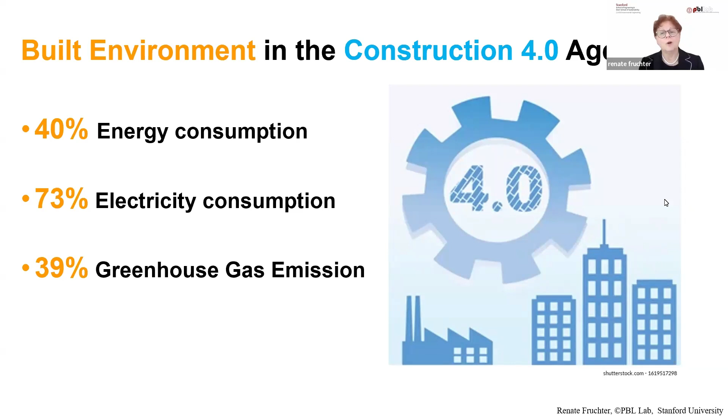Addressing in their projects the current climate emergency, coined Code Red for Humanity by the UN Secretary General, as well as reflect in their projects our AEC industry's responsibility to adopt innovative construction 4.0 processes, digitalization, industrialization, prefabrication, and new materials to build more sustainable buildings for current and future generations.

So, to address these challenges, students responded to this year's theme, Generative Minds for a Better World: AI, enhanced collaboration, and high-performance buildings. These were supported by 3 specific competition topics. The 4D Sustainability Challenge focused on time and urgency to define their sustainability impact in a temporal dimension. IPD Challenge focused on cultivating a team mindset in support of productivity in the age of construction 4.0, coined T-Mind. And last but not least, the Technology Challenge, inviting the students to connect the dots between innovative technologies, processes, and the buildings that people actually go to work and learn, focusing on sustainable, intelligent supply chain.

So this year, we gathered at this annual PBL event to listen to the 3 AEC Global student teams share their projects and team process, and discuss with industry mentors their solutions. So, without any further delay, Central team, the floor is yours.

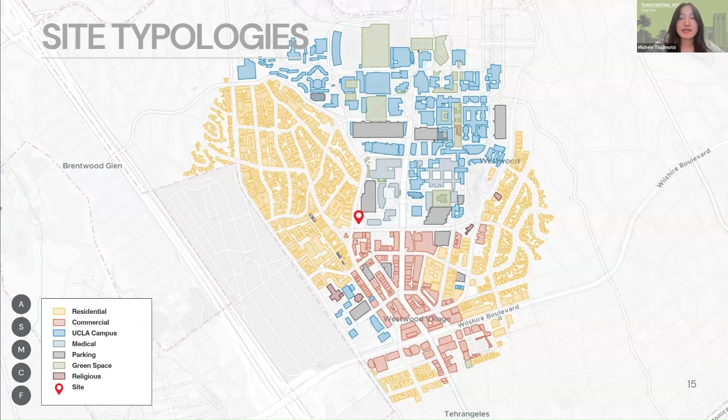As you can see, the site is located in a very congested area in Westwood with many different typologies, obviously the UCLA campus, residential, medical, etc. Most importantly, our site has many opportunities. Located on the corner of a busy intersection, our site has the opportunity to become this kind of landmark connector space, as well as surrounded by many greenery that we wanted to highlight.

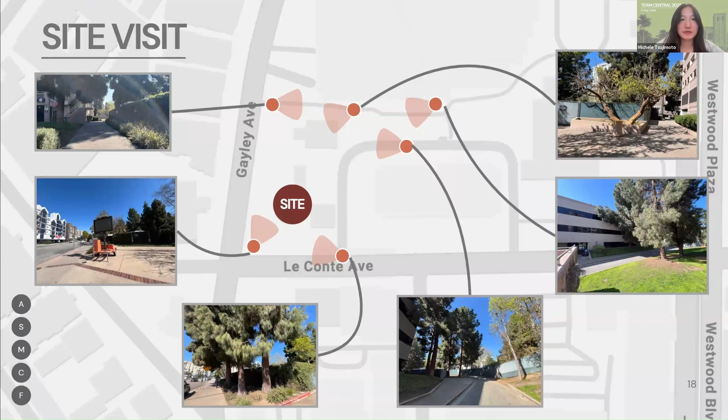Here's some shots. Our site's biggest challenges are seismic zone, high urban density and noise, but also some natural factors related to climate change, especially fires, droughts, and high temperatures.

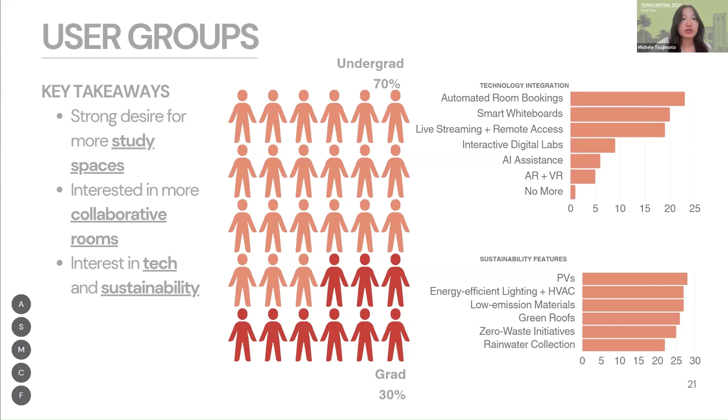Since I went to UCLA, I was able to send out a user survey to about 30 current and former undergrads and grad students to understand what they didn't like about the current building and what they want for a new one. The key takeaways were that they wanted more study spaces, more collaborative rooms, and more integration with tech and sustainability.

We mapped out three different UCLA personas: me as an undergrad, a student researcher, and a professor, to understand how different users interact with the site, how they move differently, and how the space could be used.

Our 16-week workflow is best captured by a chutes and ladders analogy, with ladders representing accelerators like AI integration and early goal alignment, and chutes marking pivots and clashes. Still, each turn moved us forward through fun learning and adaptation.

We reimagined the building lifecycle as two interconnected infinity loops, one virtual and one physical, where we build a project twice at least. First, we create a digital twin using data integration, simulations, and collaboration tools to test, iterate, and fail early and cheaply. This enables the physical loop to unfold with clarity and confidence, directly benefiting from insights gained virtually.

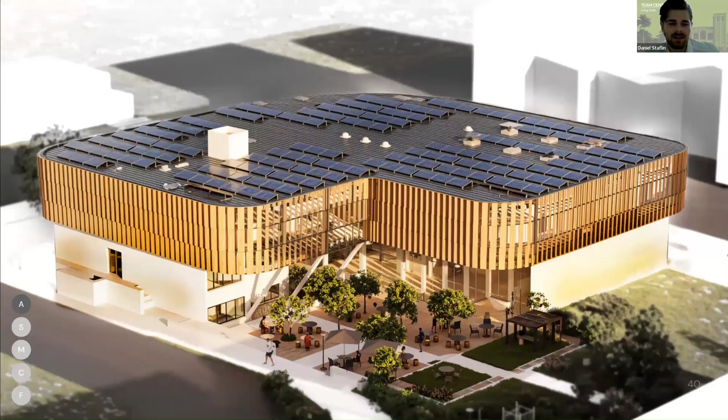Now onto our concept, the living oasis. It was directly inspired by our perception of the site, with the very dull and grey intersection contrasted by the very green corner. We saw this as an opportunity to create a landmark entrance to UCLA by utilizing the existing nature and rooting ourselves in the culture of UCLA, thereby creating long-term sustainability.

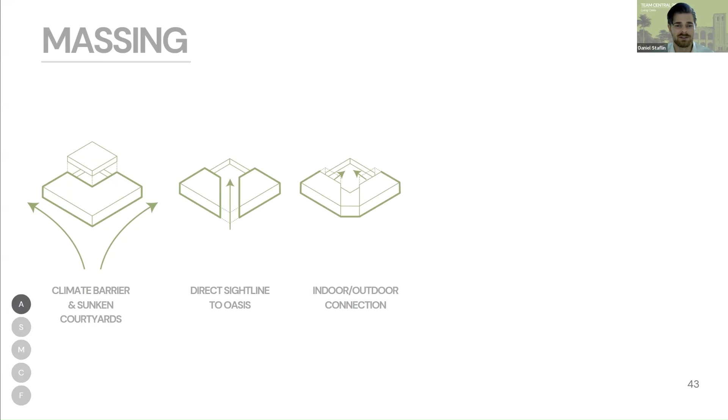Our massing evolved by firstly placing the building as a climate barrier from the intersection and from the wind. Then we excavated the naturally shaded courtyard to create thermal comfort and for the Santa Ana winds. Then we created the direct sightline to the oasis through the building, creating the indoor-outdoor connection to the courtyard, and lastly, we placed the cantilevering treetop for the final building.

Our concept has evolved through many stages, though the concept itself has stayed relatively the same since the kickoff. The footprint and the axis has been reassessed many times as we went through the iterative process and gained new knowledge.

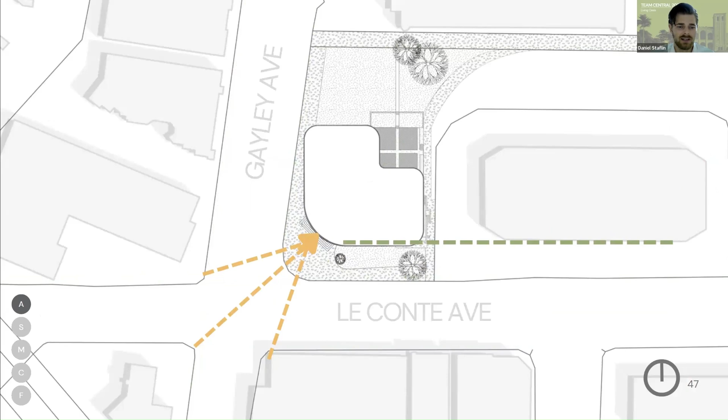The building itself is placed facing the intersection with multiple different entry points, and the recessed entrance also helps to improve the circulation around the site. You have direct sightlines from all across the intersection, and we added an extra footpath for increased flow.

Now onto an overview. Most of our program is based on the idea of the flipped classroom, where lectures are assumed to be mostly done from home, and the university is reserved for more group work, PBL focused group work, mentoring sessions, as well as just a social space in general.

The main problem that we found in existing buildings is the lack of occupancy in the auditorium and classrooms for most of the day. So we leveraged this to create dual space co-working spaces.

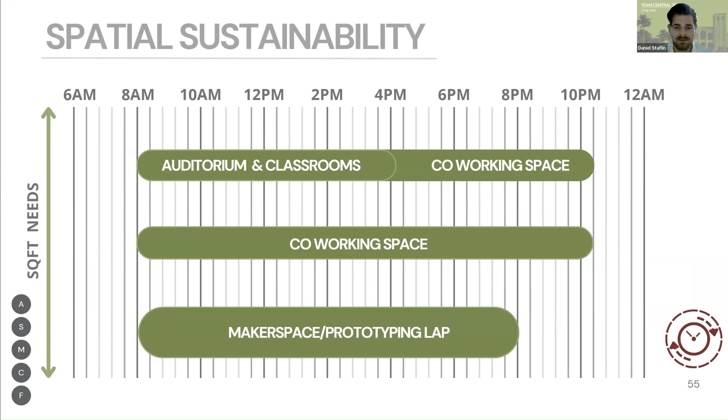Key spaces in the living oasis bottom floors are the clear entranceway, the lounge, cafe area, the adaptable event space, as well as the courtyard. So given the LA climate, it is a very obvious way to integrate the courtyard even more, which would really help for the client team.

On the 2-level basement floor, we have the adaptable auditorium, as well as the Fab Lab and a prototyping lab. And on the first floor, we have the entranceway, the exhibition space, and the classrooms, adaptable classrooms.

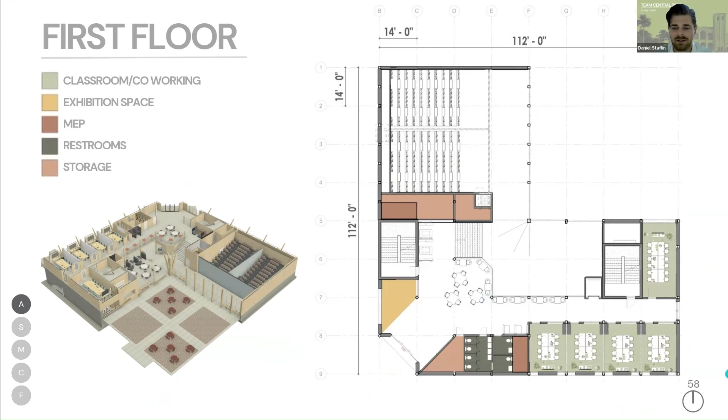On the top floor, we have the more private space. We have the hot desking, the deep workspace, the focus pods and meeting rooms, as well as an open co-working space and an adaptable classroom.

This openness in the building creates very clear wayfinding, and circulation happens on equal terms for everyone. Here you can see the circulation for normal use, and next you can see the accessibility for people with accessibility needs.

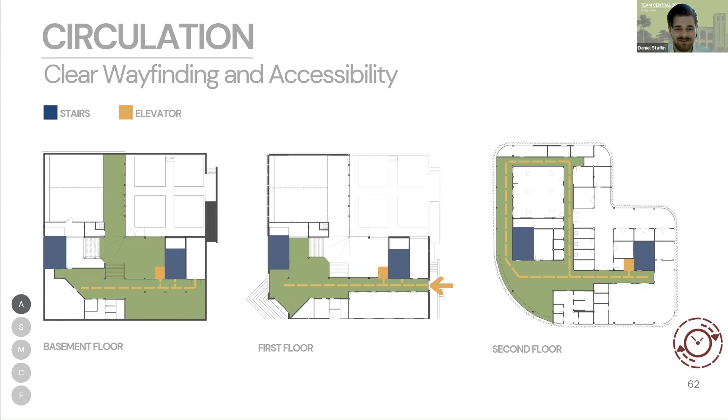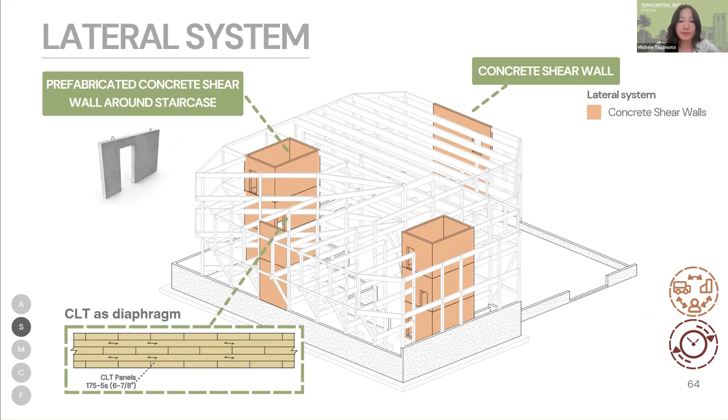Next, onto our structural system. For our gravity system, we're using mass timber everywhere with prefabricated concrete retaining walls around the perimeter excavation. For our lateral system, we are using prefabricated concrete shear walls as cores around staircases and also isolated areas near the entrance and the auditorium. The CLT acts as the diaphragm. You can see the load path for both gravity and lateral.

Our main modal participation begins at mode 3, where we begin to see more typical building-wide vibration behavior involving the rest of the structure. Importantly, the first 6 modes capture over 85% of the mass participation, representing the building's seismic response.

Then we looked at interstory drift ratios and story displacements using 3 different analysis methods. All the methods produce fairly similar results, with response spectrum analysis giving us the highest drifts and time history relatively the lowest. We use the El Centro record as the ground motion input.

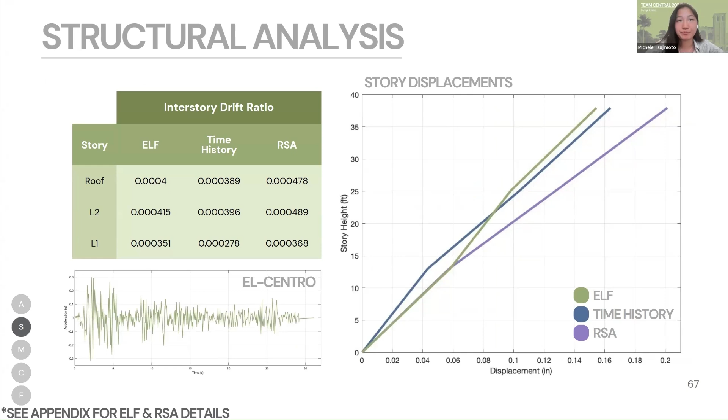To give an overview of the HVAC systems, as primary systems, we use photovoltaics and a heat pump, and we also have batteries to store excess energy. For secondary systems, we have overhead VAV ventilation with jet nozzles in the auditorium, and also separate exhaust systems for the fab labs, restrooms, and battery room. This is how our air distribution looks like.

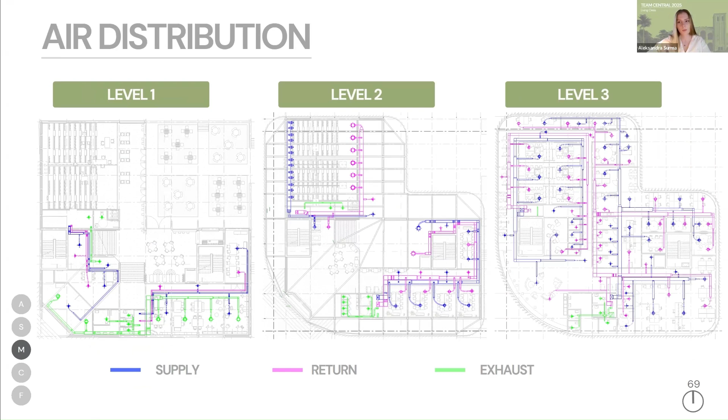Now onto the concept goal of creating a sensory sanctuary for social sustainability. The architectural expression is experienced linearly, referring to the metaphor of the oasis.

We step over the sand dune, then we get the clear sightline onto the oasis. Then we step inside and get the refreshing breeze and the thermal comfort. Then we step ahead and look down onto the oasis with the view framed by the living walls. And lastly, you step into the oasis space, which is a lively indoor-outdoor space.

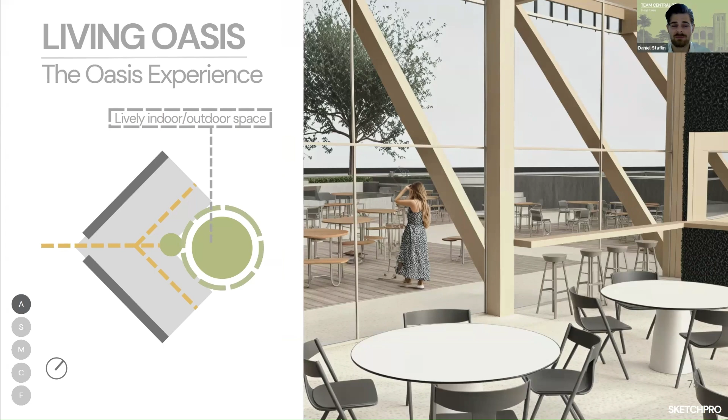In relation to our sustainability time challenge, it is important to include the user as well in our building. We believe that an informed user creates a better shared direction between us, the design team, the client, and the user. This is why we have introduced a user dashboard in the entrance of the building.

And in order to nudge transformative behavior, we're giving this performance overview to the user, which also includes the building occupancy, the room CO2 levels, and also a green tip of the day to ultimately give the best possible user experience.

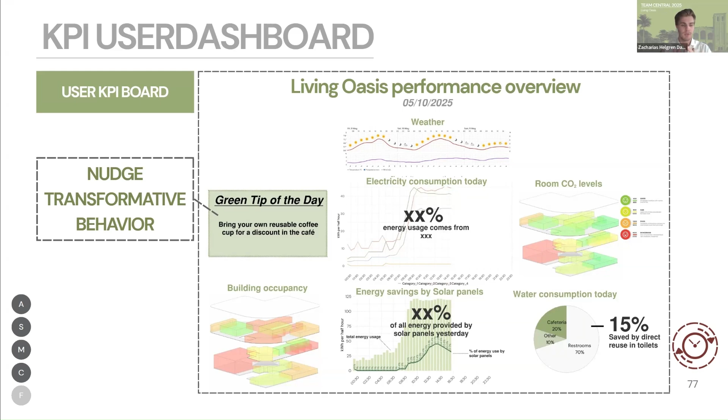In direct connection to the users, our living walls surround the main social area, improve sound absorption by up to 60%, and enhance indoor comfort. They also sequester around 1,000 kilograms of CO2 per year, contributing to a more sustainable environment.

Financially, the system requires an initial investment of 115,000 with some ongoing replacement costs, but still for the visual quality and positive impact on the users, we consider it a valuable investment that brings life into our building.

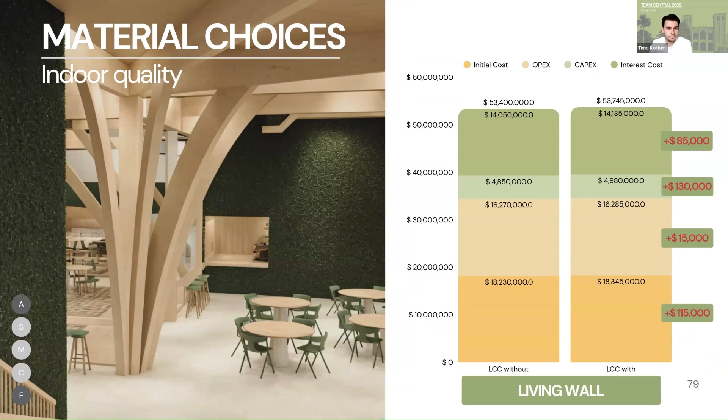Now, our material choices help to provide a healthy indoor environment. We have a very thick envelope, using insulation like hempcrete to optimize the ventilation system. We've used hempcrete for its properties of being carbon negative, not releasing any pollutants into the indoor environment, being biodegradable, and also for its acoustic performance.

We've used Accoya for many of the same reasons, and also its high durability and its patina, which supports the architectural vision. Also, we have used wood on the interior to help enhance the well-being and productivity of its users.

And to ensure the best possible air quality in our building, due to Santa Ana winds and fires, we use mechanical ventilation with two-stage filtration with MERV and HEPA filters. So proper filtration with regular filter replacement allows us to provide an even better sensory sanctuary experience and users' well-being and health.

Next on to the organic structure design concept goal. We wanted to create a building that draws inspiration from nature's organic shapes while remaining structured, efficient, and strong.

We're looking at the evolution of a structure system. We most importantly wanted to create an even grid, but oftentimes this didn't align with either architectural or adaptability goals. As we progressed, we continued to work with MEP and architecture to create structural systems that were fully integrated for both our mass timber and steel options.

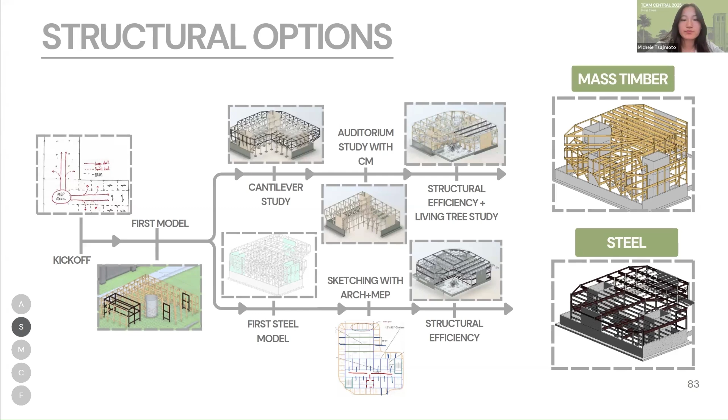Looking at these options, we identified key performance categories and identified which was stronger. Steel had stronger structural strength, fire resistance, and repairability, while timber had stronger sustainability and constructability. Ultimately, we wanted the timber option because of its sustainability and ability to design for disassembly.

And here are the live loads we used. We simplified our unique loading conditions to ensure that the structural system doesn't constrain future flexibility and adapting the rooms to evolving user needs.

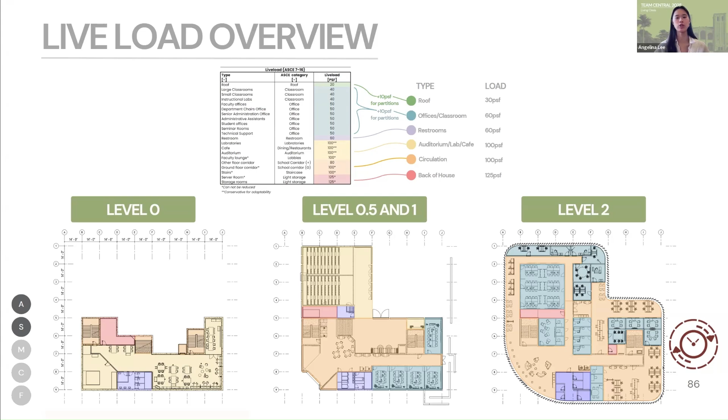And our foundation uses a combination of prefab retaining walls and isolated concrete footings at 2 different sizes.

On level 1, the main areas to note are first the collaboration with Arch, MEP, and CMs to rotate the grid around the entrance to enlarge and better frame the views to the central courtyard. There's also slanted columns around the perimeter to support the cantilevers.

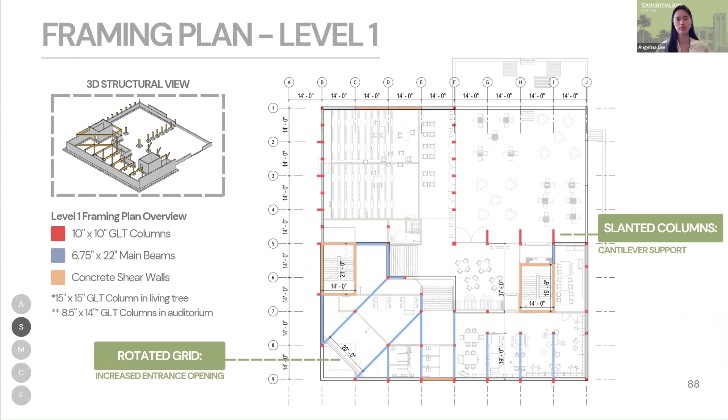As mentioned, we rotated the grid of the entrance. Initially, a west-facing entrance had poor sight lines into the Oasis courtyard, but after a virtual site visit, we noticed this kind of natural diagonal entrance from the busy intersection. So we shifted the entrance grid at 45 degrees to create this clear sight line.

And then also level 1, spanning 2 stories, is our key living tree feature with curved columns that further our Oasis concept and also structurally maintain our main beam member sizing by reducing this longer span length.

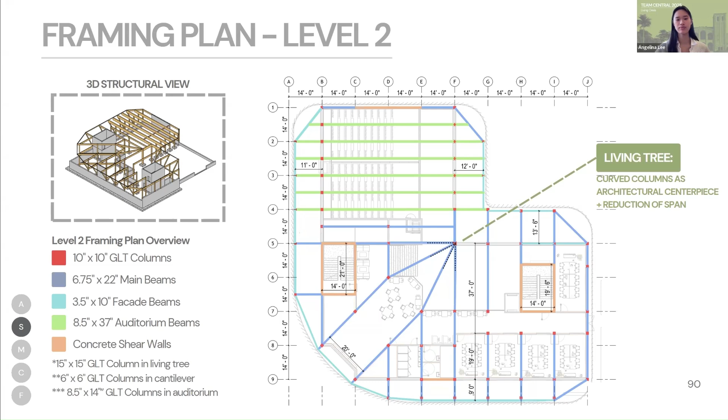To actually construct our biophilic tree, there was a lot of coordination with CMs to determine the logistics and locations for special connections for the slotted steel plate and dowels to allow for manufacturing, delivery, and erection of these double height slanted or curved columns.

And on the top level, the beams are value engineered to reduce unnecessary material and costs.

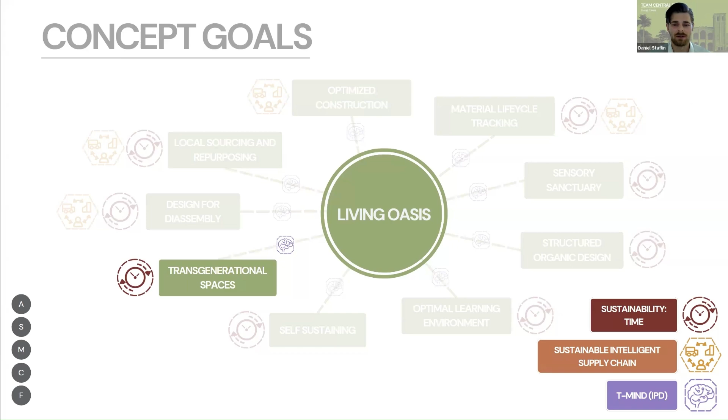Now onto our transgenerational spaces concept goal to create value for people in the long term. We have these adaptations to the auditorium space. It can either function as an auditorium seating 180, a fully open event space, or a classroom. This can either be PBL or traditional system.

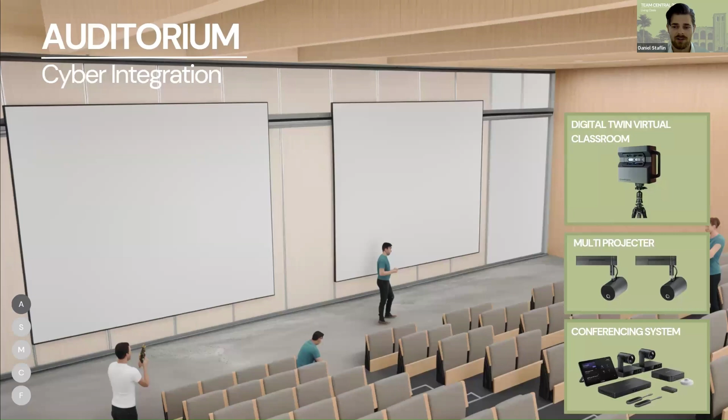The auditorium integrates tech to create a digital twin classroom for online lectures. It also has a conferencing system and multi-projector system, which integrates well with the event space to provide 360 technology. What makes this whole system possible is the tiered retractable seating, the multi-directional operable walls, as well as nested furniture and a dedicated storage space.

As we mentioned, the auditorium is ventilated with jet nozzles. The supply system is hidden behind the wall, while the return is located on the opposite side under the beams to avoid clashes with structure.

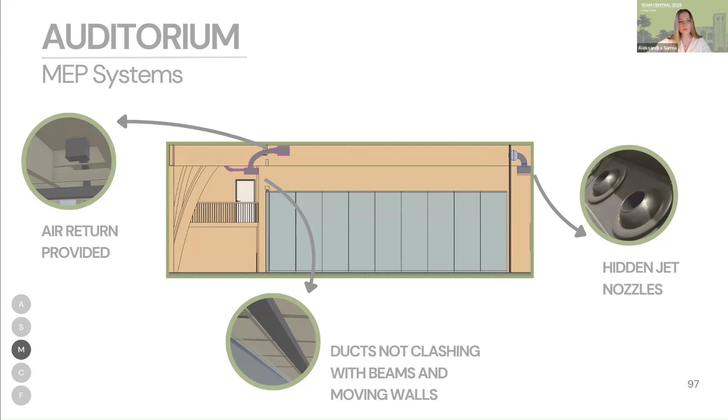The area shown here in orange serves as an event space with an estimated annual rental income of $100,000, including minor security upgrades for the auditorium and staff. The total life cycle cost over 24 years is around 2.8 million.

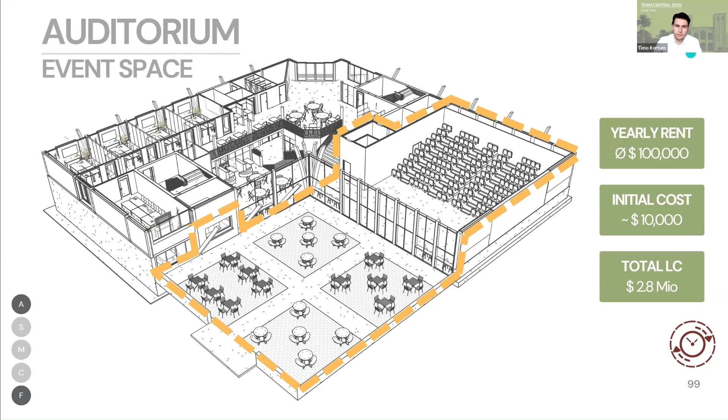As part of our IPD challenge, we believe in data-based and informative decisions, which is why we've always performed these studies to determine the value of each variation of a concept. The big revelation came when we realized our auditorium study and our cantilever study were not separated, but were inherently linked.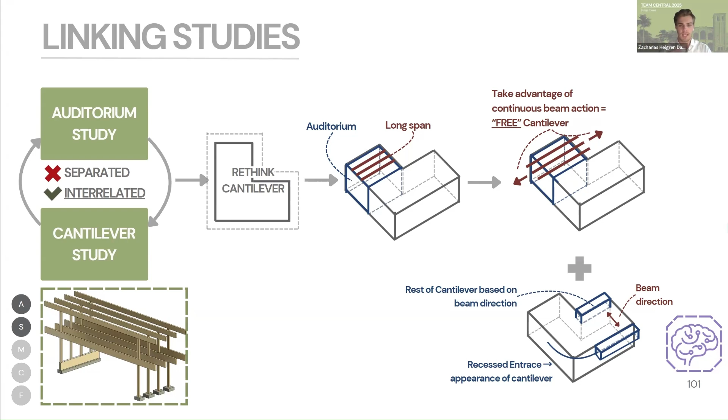This made us rethink the entire cantilever, and by extending the long span in the auditorium, we could more or less reduce the cost of the cantilever significantly.

The auditorium has been through major changes throughout, but a focus on integration and collaboration has always been the centerpiece throughout the entire process.

A key example of this was working with Arch to reduce the live load on top of the auditorium, right here, as well as working with the construction managers to look at the connections and design them both for transport and to optimally design for shear and moment.

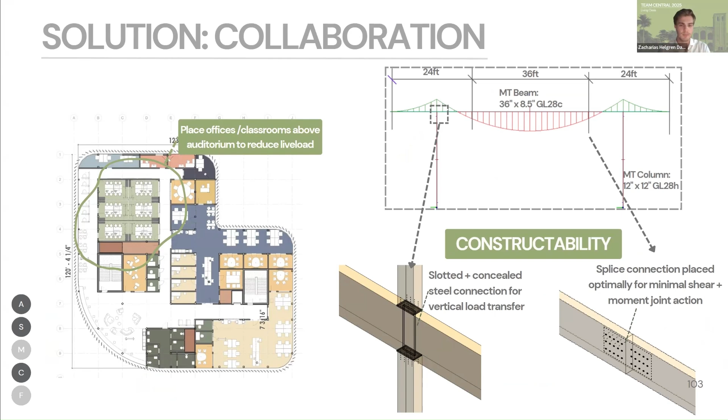As mentioned, the beam pieces will be delivered and assembled on site. Since the auditorium beam's total span is 84 feet, we plan to move and construct using a tower crane, which has an arm extension of approximately 131 feet. This is so that we can construct well on site.

Directly in front of the auditorium, our cafe is generating about 7,500 in annual rent with just a 6,000 initial investment and a life cycle value of around 190,000.

It serves both indoor and outdoor areas from the auditorium, as well as supporting events there and fostering informal exchange for daily students or visitors. Beyond the rental value, it strengthens long-term social sustainability and user well-being.

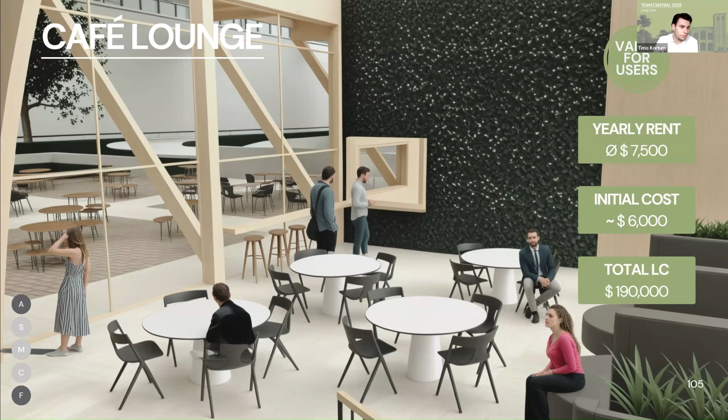Now on to creating the optimal learning environment. We know from the user survey that the users want more collaborative spaces, so we focused our plans on creating a diverse learning environment, inspired by cases like WeWork. We have social spaces, collaboration spaces, learning spaces, and more personal spaces on the top floor.

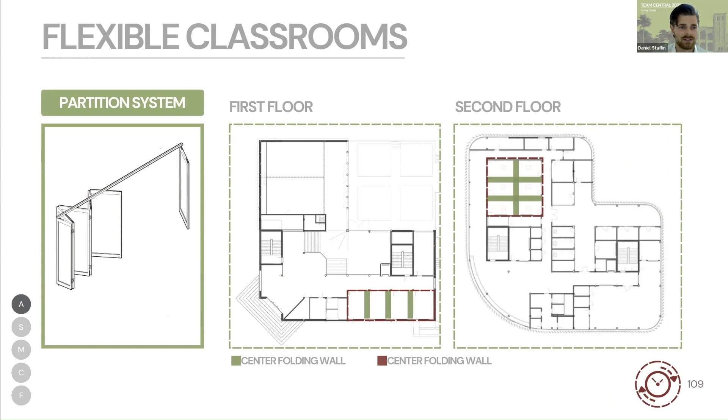For the flexible classrooms, we have two sections, and we use this center folding wall system. Specifically for this space up here, it can adapt in two dimensions to a co-working space, one big classroom, or two smaller classrooms.

Because of the folding walls, which have special structural requirements, we placed main MEP ducts in the corridor under the beams. To hide the visible crossovers of the ducts, we used a suspended ceiling on the second floor to provide a better aesthetic feel of the building.

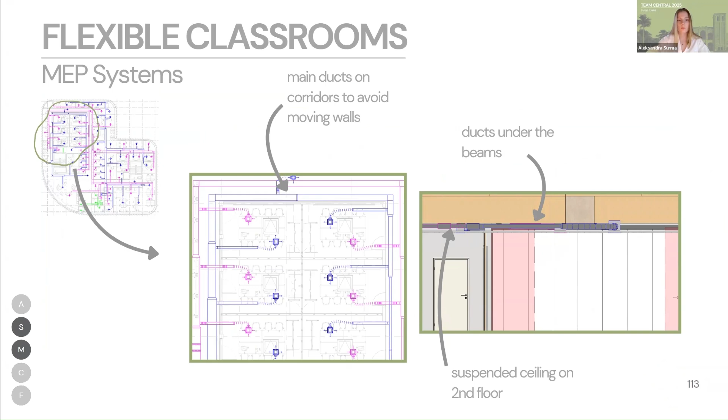To meet our users' need for outdoor study spaces, we designed the courtyard as an extension of the indoor environment, as you see right here, where additional study spaces have been introduced outside. This concept was inspired by UCLA's bomb shelter, a very popular student study area, which we experienced during our virtual site visit.

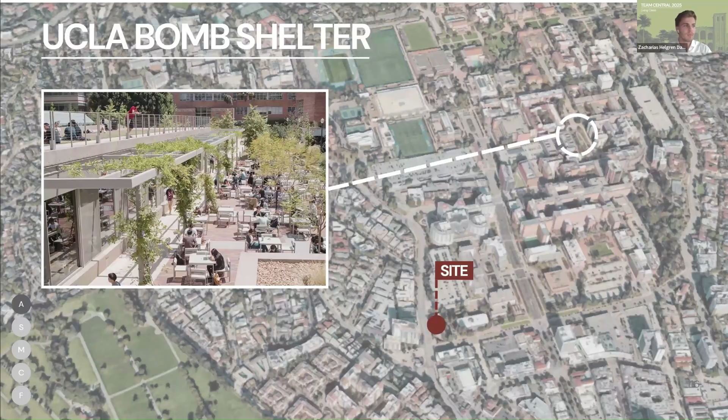This courtyard has also seen rapid evolvement, especially trying to reduce excavation while simultaneously optimizing the comfort area. A major constraint here has been the site limit: we've had a hard constraint of 30 feet above the ground, which has forced collaboration between all disciplines.

One way we reduced and optimized the building for this was after our concept presentation, we reworked our entire framing system and reduced the span. We introduced double span CLT slabs, which let us route the MEP between the beams, perpendicular to the beams, resulting in an excavation reduction of over 3 feet and a cost reduction of $90,000.

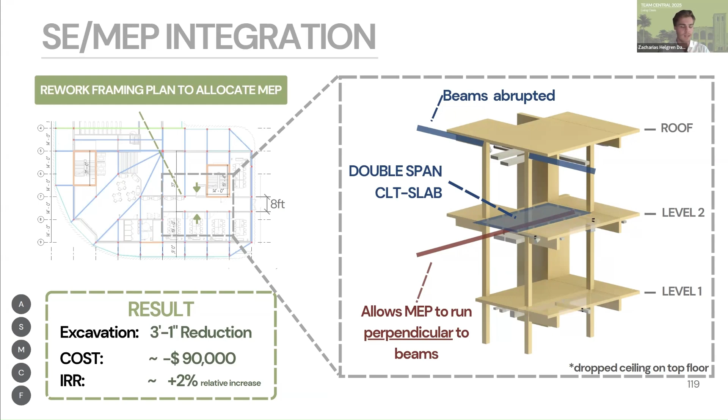In reference to the long-term sustainability impact of our building, we decided to produce energy from photovoltaics on our roof. The excess energy is partially stored in batteries, giving us backup energy for several hours. The remaining energy is sold to the UCLA campus, because they are currently using cogeneration to provide electricity, but it's enough for only 80% of the campus's energy needs.

And also, to reduce energy consumption and related costs, we implemented night cooling.

To realize the living oasis within a harsh concrete dominated environment, we used photovoltaics to implement a PV system that enables almost 90% self-sufficiency, creating an almost independent island system in this area. This transforms the surrounding concrete desert into a vibrant landmark with our PV system.

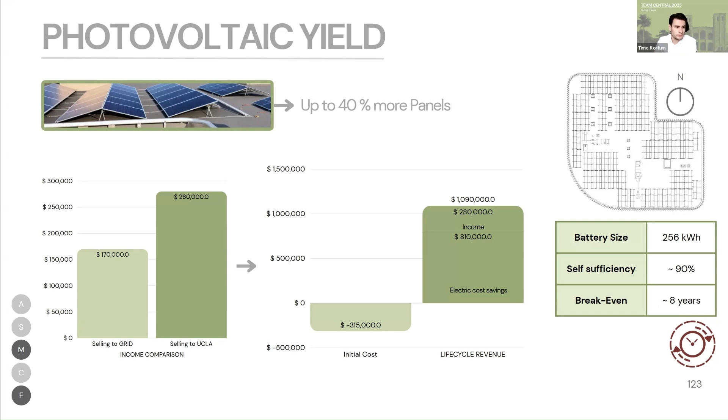Also, in response to future climate changes, mostly related to droughts, we will use water as a long-term sustainability solution. For that, we have planned 2 underground tanks for grey water and rainwater. Rainwater can be used for hand washing after proper filtration and disinfection, while the purified grey water can be used for toilet flushing and greenery irrigation.

We also decided on a unit to produce drinking water from moisture in the air, which can fully provide the cafeteria's needs, as well as some tap water amount. And to reduce water needs even more, we use vacuum toilets and water saving taps.

So with all of these solutions, we have reduced the amount of water that we need to purchase from the grid by 76%.

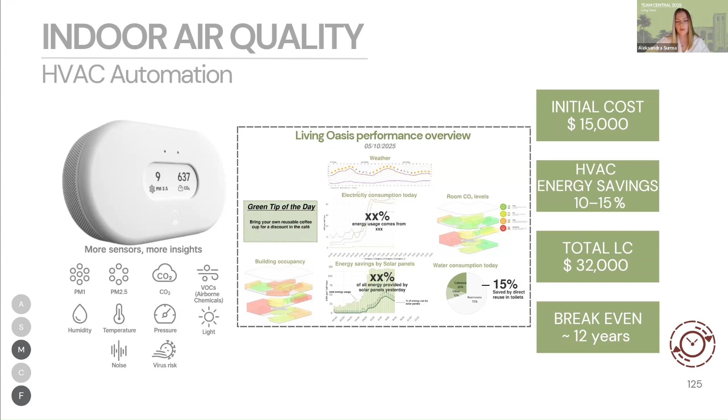To extend even further the living oasis, we are improving air quality and acoustic comfort with smart sensors from AirThings. So we use this data in 2 ways. First is for HVAC automation, which means the system monitors air quality and adjusts ventilation only when it's needed. The second is noise mapping, to help identify areas for future acoustic improvements.

And with this investment, the system delivers 32,000 in lifecycle value, but for a long time it's good for sustainability as well. So as part of tracking our sustainable goals, we have done several iterations of STV.

The first one was made with just preliminary assumptions. The next iteration was made with more accurate data and TVD input. After that, we noticed we have a problem achieving the targets, especially for water. So we decided to implement solutions such as water harvesting and water-saving restroom fixtures. With this, we reduced water consumption, but it was still over the target.

So we set up a team meeting to discuss this STV, and together we found some mistakes that had a huge impact on the results. As a final result, we are currently even below the established goals.

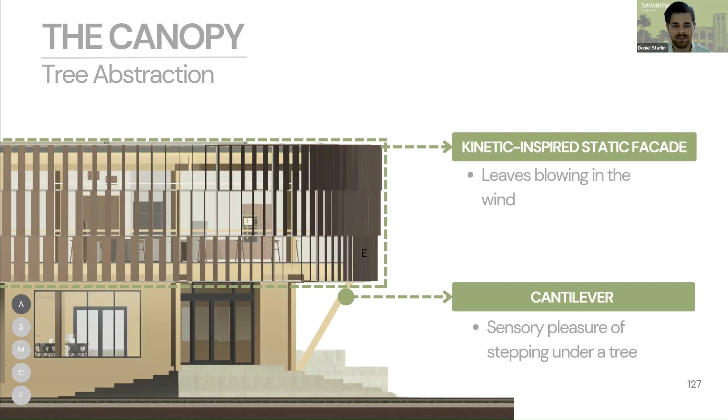Now, the building itself tries to abstract the tree, with the canopy and the leaves blowing in the wind, and the cantilever. On the inside of the top floor, we try to emulate the sense of being inside the oasis canopy.

And the evolution of this facade happened through many different stages, and it happened collaboratively to increase the SDA KPI. Initially, it was supported by the metaphor from the architect, and then later on the MEP noticed the benefits it would gain from dynamic daylighting.

Then at a team meeting, we were informed that this would be way too many parts by the CM, so we condensed it a little bit to now be a 3-part dynamic shading system.

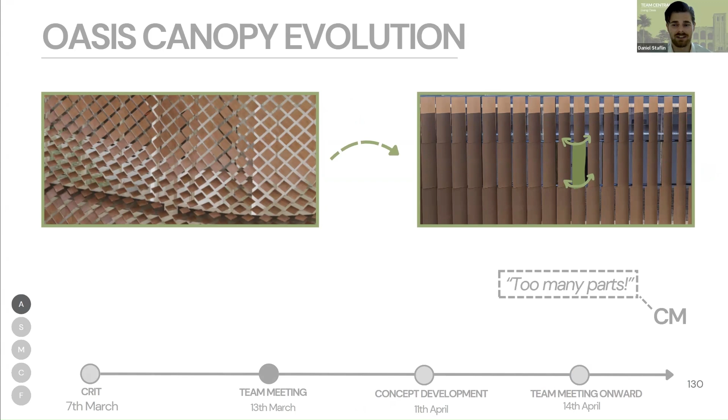Next, we were informed by the client and the LCFM that this would be way too costly, both in the short term and in the long term. So we collaborated to evolve it to a static facade instead of a dynamic facade.

Now, this led to an evolution of the static facade system that started with optimizing each room for the optimal shading angle, a UDI study. Then we put it into Grasshopper to develop the organic shape, where we first optimized for the daylighting and then next optimized for the view.

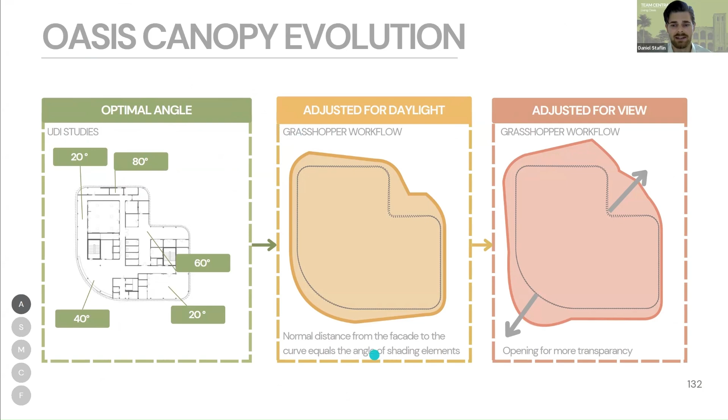This process altogether saved us around $400,000 and improved our SDA to be 77.4, and in total, a 91% reduction in parts.

Also for the daylighting, we implemented solar tubes in underperforming areas, and this was mainly to reduce the operational costs and the energy needs.

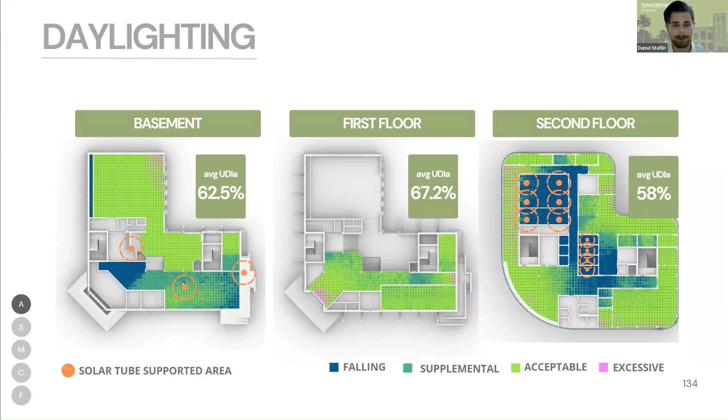Now onto the concept goal of optimized construction.

For this site, several factors had to be considered for pre-construction and on-site construction. Some of these include that we have a nearby hospital, so we had to have careful management for noise and traffic. There are also trees that we didn't really need for our design, so we thought about removing them.

So we decided that we were going to do tree relocation rather than just removing the trees. After reviewing the trees on site, we realized there were some live trees. We want to relocate them either to UCLA Botanical Garden or to the National Cemetery. This is so that we can preserve the biodiversity and the carbon storage.

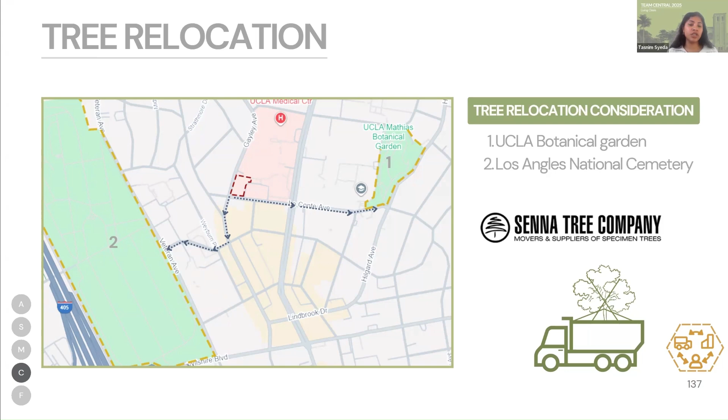So for the equipment, we consider the aforementioned crane, as well as an excavator with a 1.3 cubic yard bucket. It has a maximum reach of 20 feet, allowing us to work comfortably in the excavation. Also, an extendable articulated boom has been considered for transporting small parts. This boom was intended to transfer materials from the lower to the higher levels.

For our site logistics, we've located our storage and offices on the northern side because it's the most quiet area during construction. We've also done recycling and waste near gate 1, so this is easy and regular removal. And we've also made a temporary road through the actual site so that delivery and access is easier.

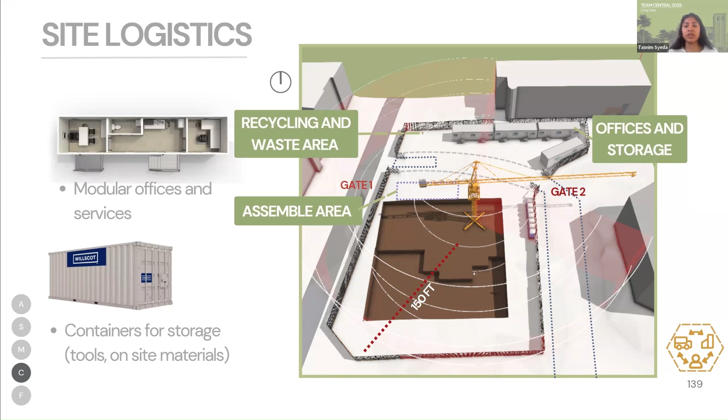The structural and waste management plan was developed to support sustainability under tight timelines. Packaging, scrap, and surplus material are sorted on site and sent to recycling, potentially generating income for minor site needs. Waste is tracked using departure sheets for each vehicle to estimate total waste generated. Further details can be included in the appendix.

So here we can see a simulation performing in Fuzor. The optimized construction schedule was imported from Alice and the model exported from Revit was incorporated. We can take into account that the largest flow of tasks occurs between the completion of the structure and the start of the interior works, which includes tasks such as installing interior ducts and interior partitions, walls of the building.

For the concept goal of local resources, we also have developed a kit of parts. During the design, architectural elements were minimized to 12 types, identical in materials and different only in size. The structural elements also were reduced to 6 elements in total, varying only in length.

The key parts include brackets and connection plates based on the shipment type. Coordination was done by manufacturer, with quantities calculated using the Rothoblaas spreadsheet.

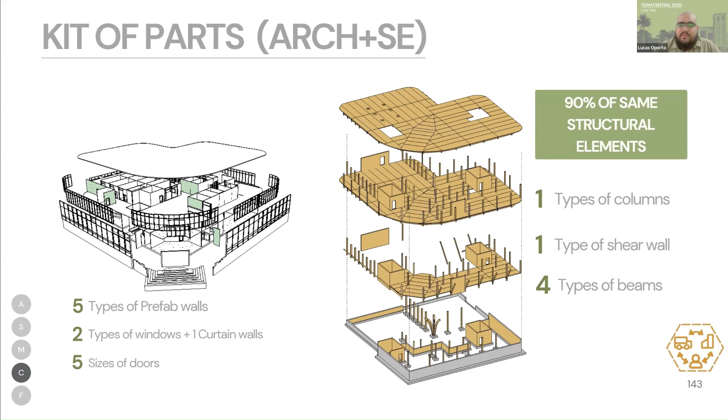To our concept goal and our goal of sustainability and time, we aim to have our main substructure suppliers within 100 miles. This is so that we can reduce our carbon emissions.

Also, with our other suppliers such as MEP, temporary facilities and equipment, we have made sure that it's all within a 50-mile range so that we can reduce our carbon emissions.

So while looking at the traffic around the site, we wanted to avoid site delays due to any heavy traffic. So we decided that we're not going to be going through the route of Westwood Boulevard for deliveries. We've also looked at time, so we'll be avoiding peak times such as 12 to 2 p.m. and 5 till 6 p.m., because that's where we found it had the heaviest traffic.

To optimize construction, we use technologies for greater speed and accuracy. We use Doxel AI as a powerful AI tool. Doxel AI uses AI-powered cameras and scanners to track construction progress in real time. It compares actual site conditions with the project schedule and BIM models.

This impacts the supply chain in 4 key points: it provides real-time visibility to detect delay early, enables better scheduling of material deliveries, reduces waste and rework by catching errors sooner, and also improves coordination between on-site progress and off-site manufacturing.

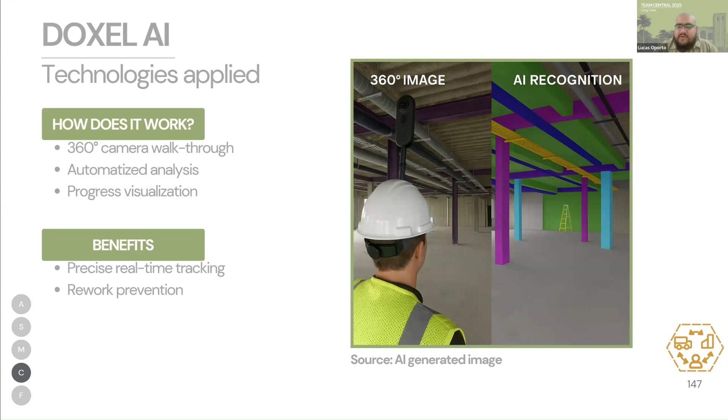For the construction budget, we reached a final total of 17.8 million, with the largest costs being structural, utilities, and furnishings. To achieve this, we tracked design changes, allowing us to see the major changes with their respective dates and how these changes affect the budget.

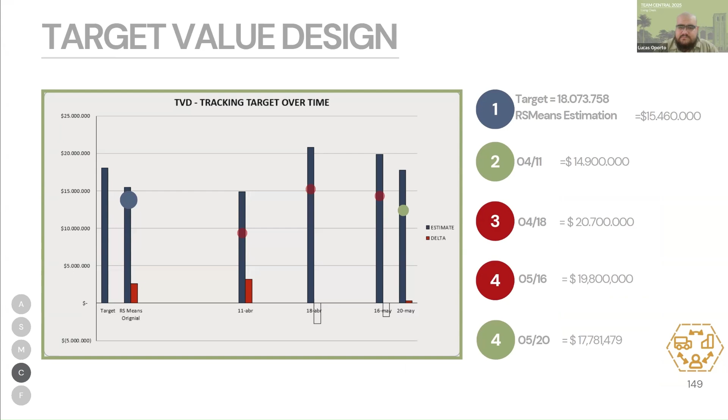We also present the workflow for delivering an intelligent supply chain. It begins with the Revit model, followed by the BIM execution plan to ensure best practices and minimize conflicts. Model data is transferred via add-ins or IFC exports. Architectural elements are sent to Kope for panelization, finalization, and CO2 equivalent estimations. For the construction simulation, we start in MS Project, optimize in Alice, and finalize for the logistics simulations. Finalized elements are then exported into manufacturing software for production.

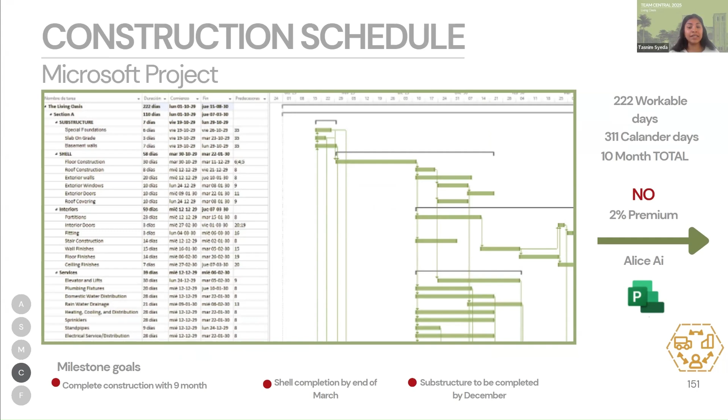We had 3 main milestone goals, but as a team, our main one was to be able to construct our building within 9 months so that we could receive our 2% premium. Initially, we produced our schedule on Microsoft Project, and we calculated 10 months for this building to be complete. So we moved on to Alice, and exported our previous file there just to see how efficient the construction schedule could be. We applied different scenarios and were able to complete our construction within the 9-month range, which meant we could achieve our 2% premium, which is great for us.

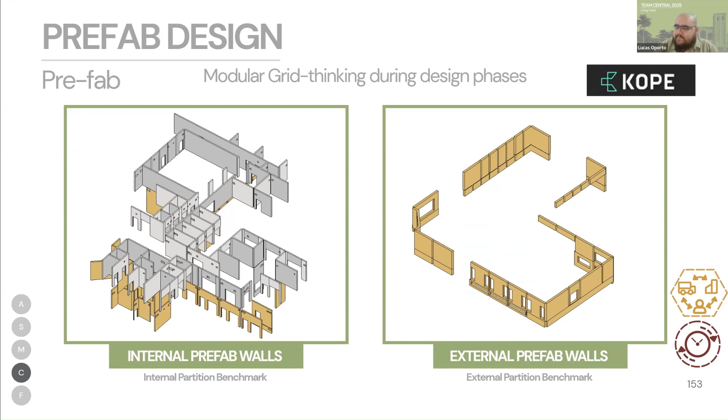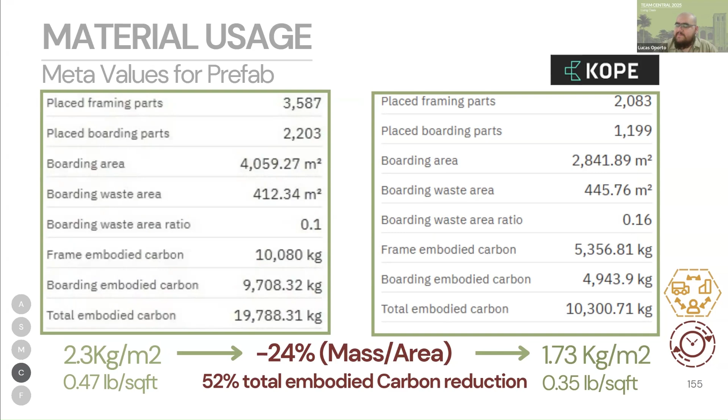Also, for the definition of the elements, we organized the whole project by construction sectors, each aligned with its specific methods. The model elements were grouped into sets using custom parameters. These models and parameters were then uploaded to manufacturing with the scheduling data from Alice, allowing us to confirm orders for coordination and plan deliveries on site.

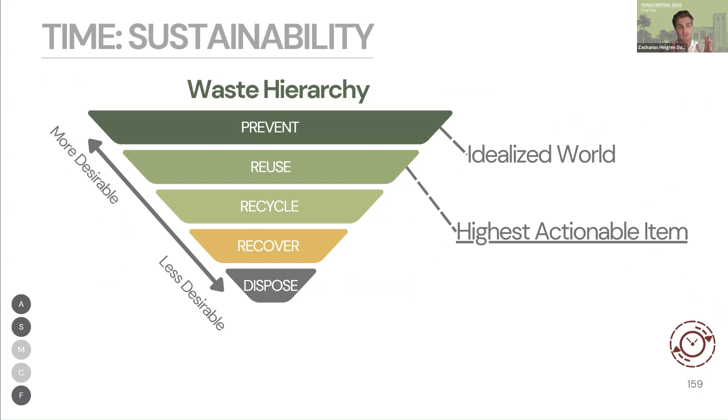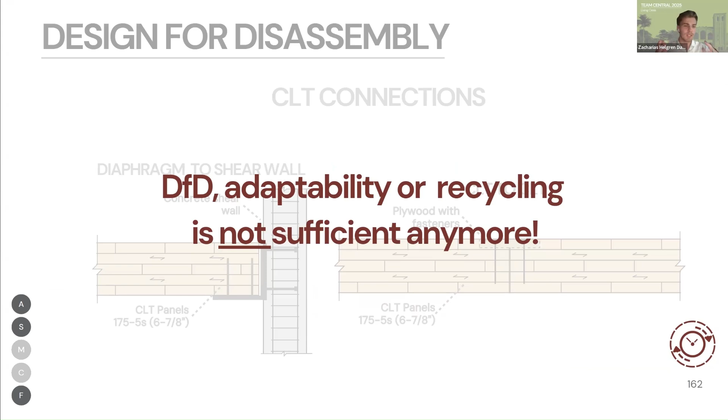But we are at a stage in our industry where DFD, adaptability, and recycling are simply not sufficient anymore. Even though something is designed to be reused, it doesn't mean that's actually going to happen. So how do we ensure this? First of all, we look at the time frame. We extend our time frame from one building to multiple building lifespans. But then the question arises of how we're going to optimize this transition zone.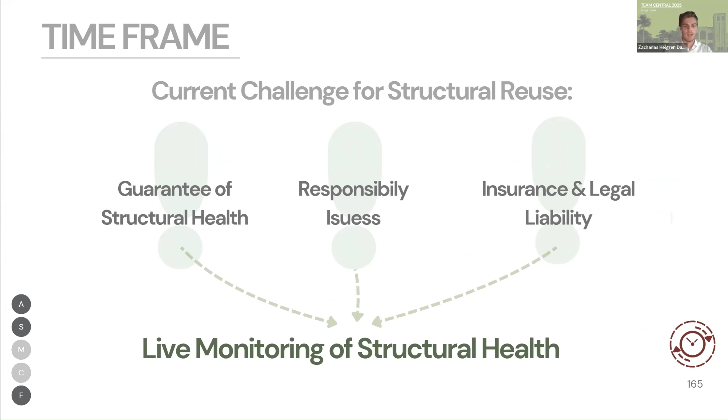As the question states, how can we design for both the present and the future building? There are quite a few challenges with directly reusing members, especially responsibility issues, but we are solving this through structural health monitoring. We are placing and analyzing key members throughout their lifetime. The end goal is that we can document and guarantee the structural health of members, which allows us to reuse them and sell them at a later point.

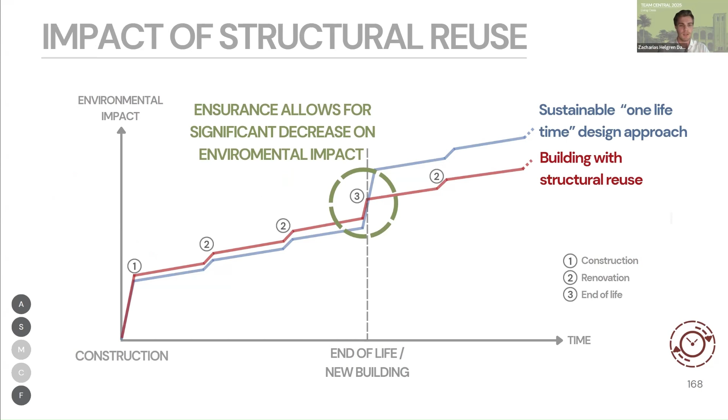There's quite a big impact of this, as seen by this graph. You see an initial increase in red of the environmental impact of using structural reuse, but a huge decrease when designing for the next building. So by introducing this time frame of the next building as well, we are seeing a quite significant decrease in the overall environmental impact through multiple building lifespans.

And even if the resale or reuse of the structure lies far in the future, it increases the resale value up to 60% and extends the building's lifetime. At the same time, it preserves embedded carbon and material value, making a long-term sustainable strategy for us.

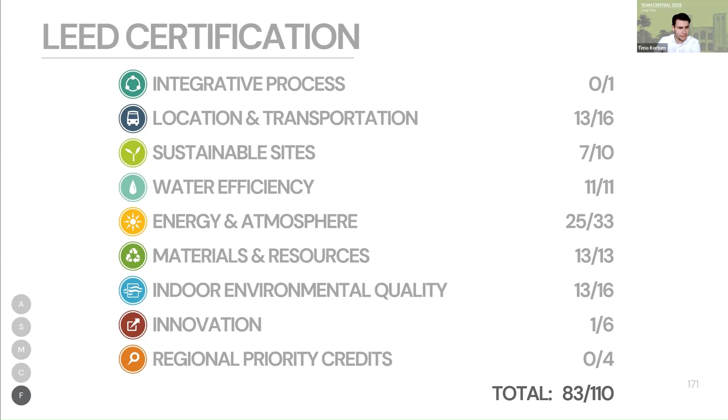Now coming to the financials and the life cycle aspects: we tried to achieve a good LEED certification, and throughout our design process we consistently focused on LEED criteria and earning significant points there. In the end, we're on track to reach LEED Platinum with 83 points, and with this, we're enhancing both building value and image.

For integrating our own disciplines throughout the project, we collaborated closely as a team using a clear structure and shared an Excel template with all the costs, leading to a complete AEC model and cohesive building concept.

With the rented spaces in the complete project, our building provides valuable additional income. The event space contributes 2.8 million alone, while the cafe and other additional rooms contribute smaller amounts, but even that will help cover future replacement costs across the building. All this rental income directly increases the IRR by 2.9%.

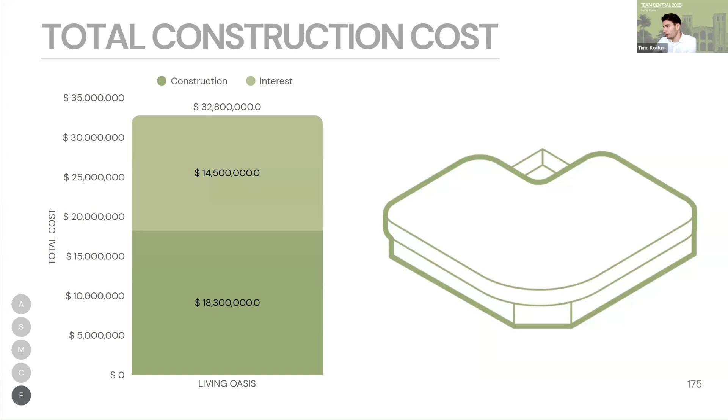Here you can see the total construction cost, like Lucas showed us earlier, and with interest together we have approximately 33 million. With this, we're leading to the next slide with the life cycle cost development.

With the financing comparison, with an interest rate approximately between 2.3 and 2.4% between all those banks, we focused on one bank because it stands out with a 4.3 net present value in millions, and an IRR of 9.6%. Sorry, why are we picking this?

Because with a 4.3 net present value, we are getting the most out of the project, but also with the IRR and high NPV number, we are getting it back a lot faster, for instance, compared to the other bank.

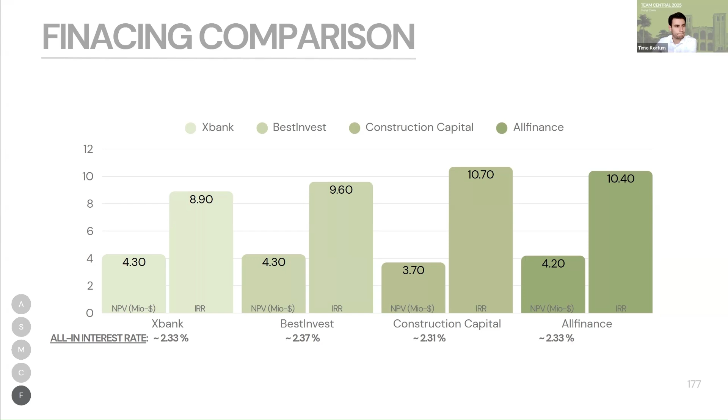Digital integration lets us fast track traditional steps. So climbing up the ladder means first, onboarding; second, choosing a specific tool for a specific task; third, critiquing outputs with a human touch; fourth, making corrections; and fifth, sharing decisions transparently.

We documented these ladders with, first, an onboarding log to check how long it takes us to learn a tool versus how long we use it for project work, and if we've actually saved time by using it.

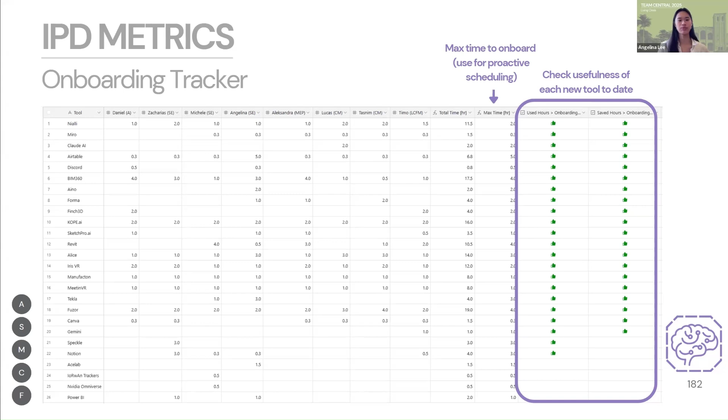Second, we have a more detailed and rigorous tracker to capture the what, how, why, when, and so-what. It logs tool timelines, input-to-output ratios, input-to-post-processing time ratios, and even compares the carbon cost of AI queries to the carbon savings they enable.

We took our Nialli pull planning data and our tool-to-task impact tracker data and combined the two through a database called Airtable, which is even more powerful than either alone.

Our tool-to-task tracker serves as training data for a small but industry-specific language model that suggests tools for Nialli pull planning activities, and activity statuses update weekly from pull planning exports, with synced timelines for consistency.

This insight helped us tailor our tool strategy by aligning tool selection with task type and project phase. Looking more specifically at SketchPro, it was initially ruled out for concept inspiration due to unrealistic generations and high post-processing needs.

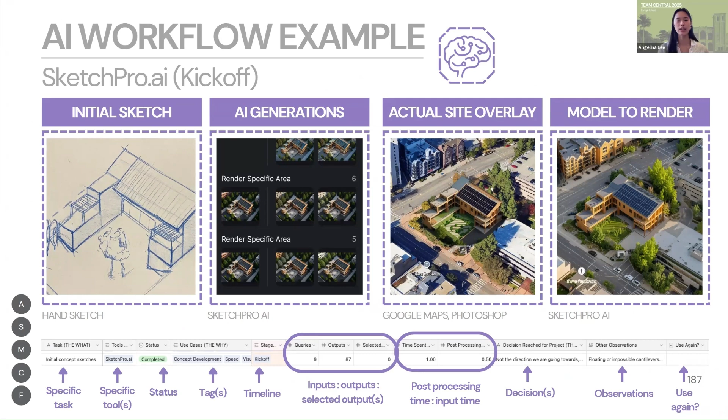So we did not check the 'use again' button in our tracker. However, we did switch strategies and later re-implemented SketchPro, but this time for upscaling Revit renders, which we loved, and then also documented.

In our phase-based toolkit strategy, we found that tools introduced 2 to 3 weeks before heavy use worked better than last-minute rollouts. Combined with our onboarding records, we have clear data on how early and how long onboarding should be, and early exposure helps us reduce adoption friction and ensure tools were proactively planned for.

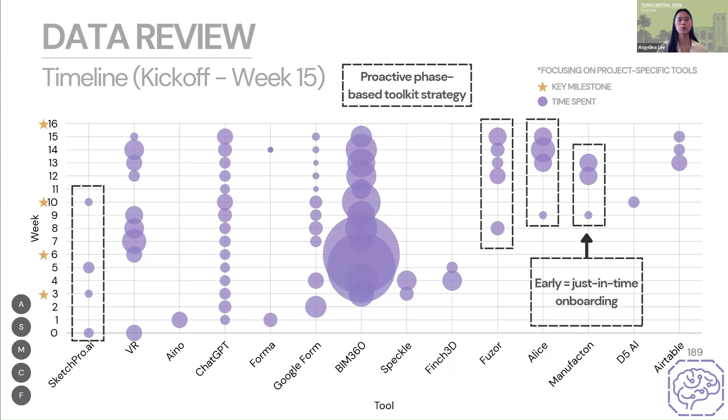And here's a more detailed breakdown of each use case and the tools used.

Our carbon tracker pushed us to evaluate not just the outputs of our tools, but their environmental trade-offs. Though full data wasn't always available, we developed a framework to track both the costs and savings where possible. For instance, using Forma-informed material decisions led to an estimated 1,400 ton carbon equivalent reduction, showing how digital tools can actively shape more sustainable design decisions.

Another thing we asked in the tracker was how efficient the meeting was in terms of time, and how effective the meeting was in terms of what was done and what needs to be done next.

We don't want to be 100% productive, because otherwise we wouldn't be having fun and we wouldn't be learning. So our ideal range is about 7.5 to 8.5.

Lastly, we rate the vibe of the meeting, how much fun we had, because productivity includes fun. We were most productive when the vibes were the highest.

During this last project development phase, we have been using KPIs and a KPI dashboard to first establish a clear project direction for all teammates, and especially to assess the impact of design changes and variations in design. These KPIs were developed based on our challenges.

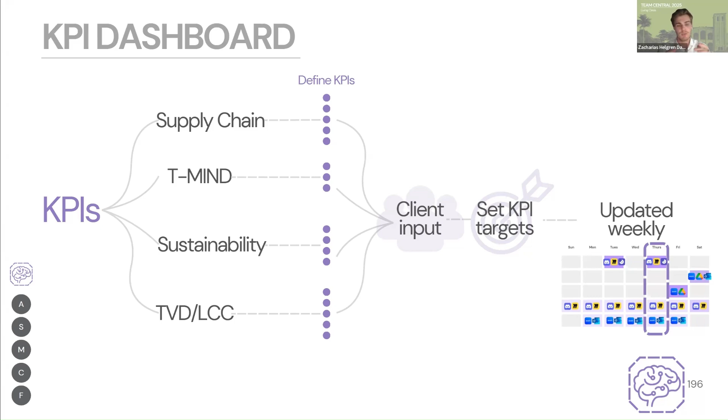Then we got our client input, set our KPI targets, and throughout this process we have been updating them weekly to track our progress and how we are doing.

This is how the KPI dashboard looks, where the x-axis on each graph represents time, and the graph represents the performance itself, with a quick overview given by the colors of the numbers.

Going through the four categories, we start with the supply chain, where we see we're hitting all five targets. Some have decreased a bit, and some have been on target the entire time.

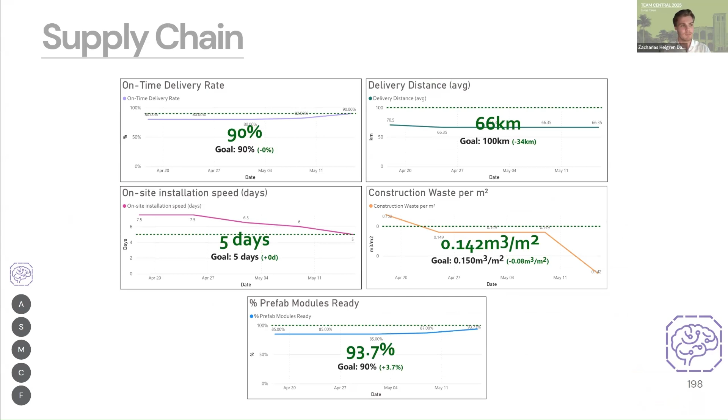We are hitting all targets for our sustainability, and actually by quite a big margin. So in this manner, we are doing exceptionally well.

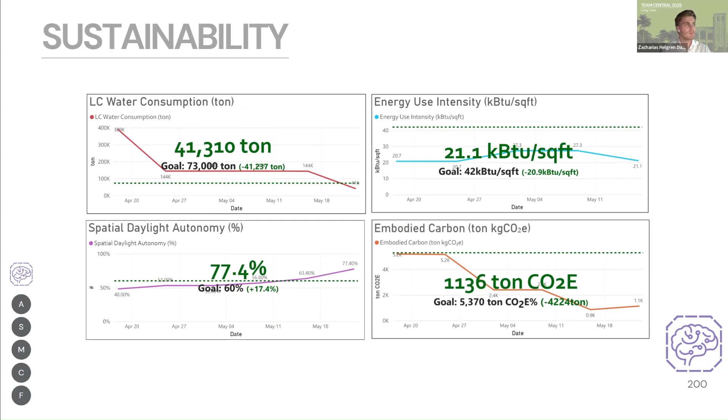Next, we'll quickly give an overview of our challenges again to show that we have been keeping them in mind the entire length of the project.

For the first challenge, the IPD Team Mindset Challenge, we were using the chutes and ladders process to think about team workflow. We start with a very big idea with different concept goals, as we've been presenting throughout.

This has helped us think about our process throughout, to be able to keep moving through the ladders. Then we have different workflow integrations that help us create a smooth chutes and ladders process. And lastly, we have our different metrics that we are tracking, like AI usage and productivity.

Our dual infinity loop leads to three core strategies for the sustainability challenge. The first, user focus and flexibility, makes buildings more useful, more often, and also more socially sustainable. Future-proofing through modularity and open-ended programs means that the building evolves with changing needs.

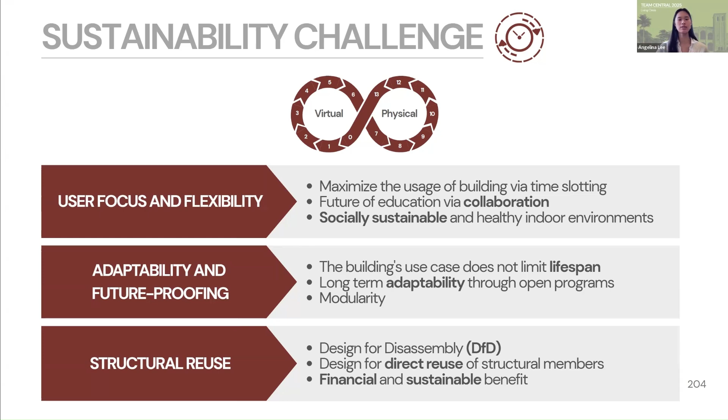And also our structural reuse through DFD ensures materials live multiple life cycles, looping through that infinity loop more than once. This is how we move from a linear timeline to a regenerative, circular building process, digitally and physically, and with our team mindset.

The technology challenge: thanks to the technologies we applied, we were able to improve the construction time by reducing the gap between tasks. We optimized the materials, achieving lower CO2 equivalent emissions, and we were also able to generate an on-site delivery schedule, which can be modified according to the needs of the project.

This entire process has been an incredible learning experience, and we have really been able to push each other to deliver the next generation of engineers, coming together in this scenario.